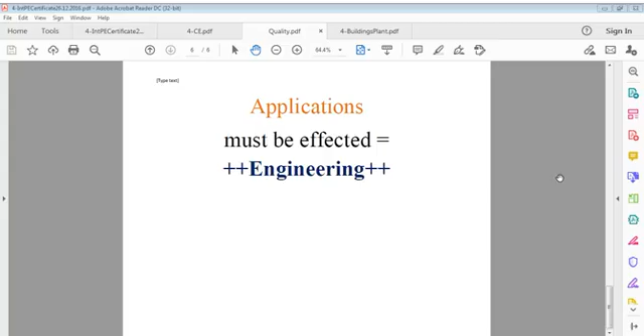So we get, in fact, artificial you can say, artificial in the sense that we can call our own made. It's natural products which we convert to our own making by thinking, by contemplation, and by compatibility of each. All materials are compatible, because they can work together once mixed, once cemented.

If we are not able to cement them, say these rock particles or fine or coarse aggregate, if we are not able to cement them, there will be no meaning to call it concrete, there will be no meaning to use it. Because God put in such properties in lime, for example, there is silica, there are so many other cementing properties it's got, and that's what we use. How we use it, what's the purpose, that's another point of view, it's another technology. But this technology we generate based on knowledge and experience and the blessings of God.

We got concrete today worldwide, the maximum used material in every construction. That adds importance of this natural product. God gave us this free of constraints, but we put constraint on that. Even today, we don't consider the full strength of this material for our construction.

Some methods consider 1/3 strength, 1/3 strength, for example working stress method. If you go to limit state method, it considers 0.66 or something like that, 66% use, and some other materials you find more than that. Same applies to concrete and also applies to reinforcing bars.

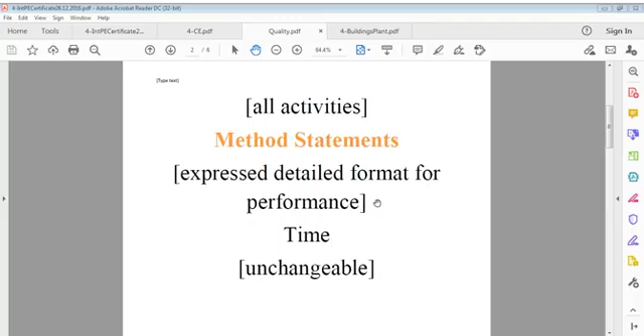We have to be reliable, our product has to be reliable, our services have to be reliable. That's the best profession. And we have to chart out ourselves what's the best I can deliver in the same cost as it was before.

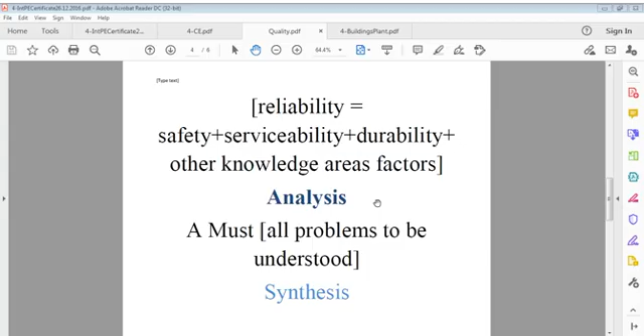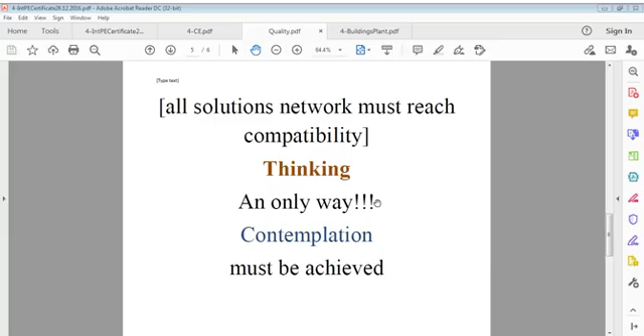We have to understand what we are talking of. We have to understand what laws exist in nature. We have to think and contemplate and to do everything. That's what engineering is all about, engineering and quality.

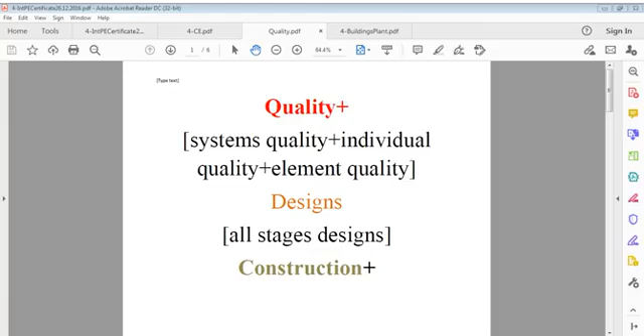And we have also to think further on this issue so that we may move further and further. We talked about many methods of importance, structural methods and finishing methods, and like that we talked.

I don't have video for demonstration, but you are educated, you can read it, you can understand it. Everything cannot be defined by demonstration. Yes, we can conduct a demonstration, but I think my talk is very common, very open. It has no representations and presentations. It's very much open talk, and that open talk we should respect.

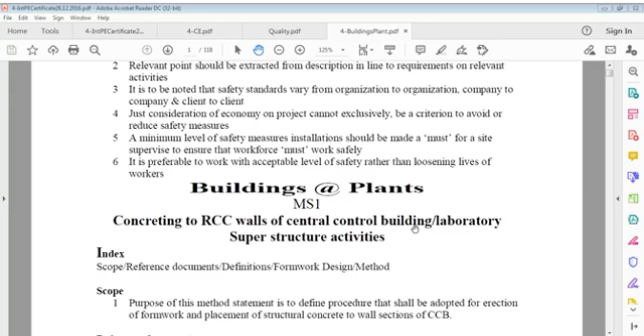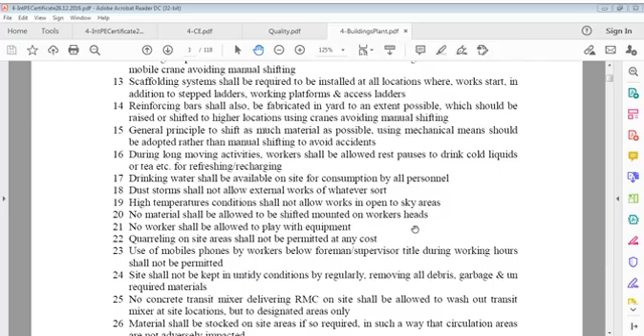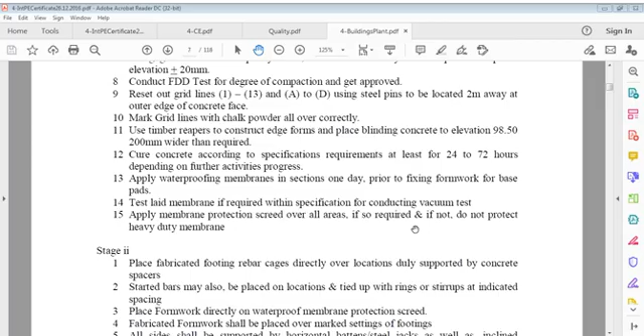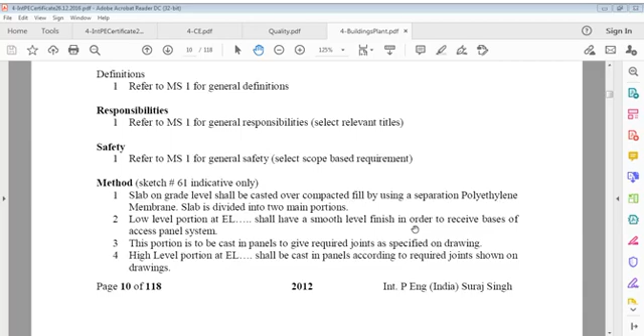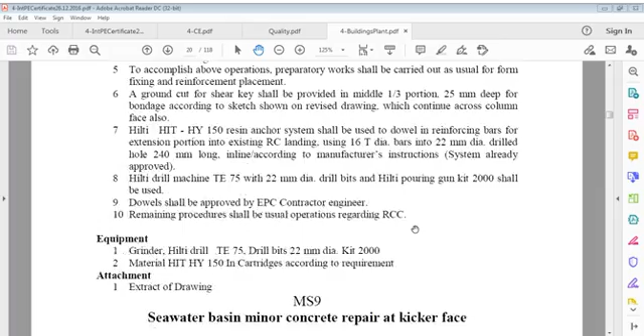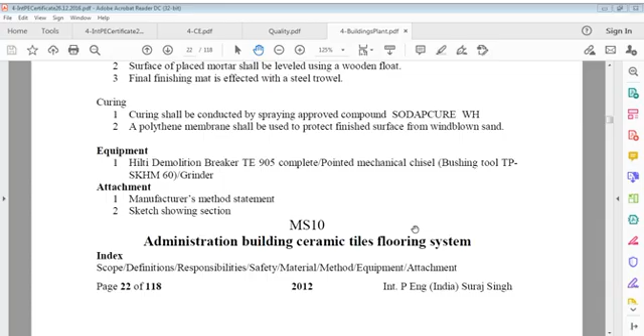When we streamline our system and our methods, that is based on our experience and our past successful works, and we take those into considerations.

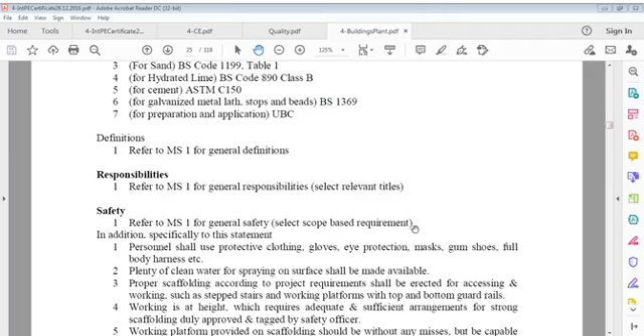There is no one method for something. There are many methods that can be used. Only one method is not enough. We can try different methods for different applications, and we can see which one is best, which is easier, which is more understandable, because those line leads,

Now, when we move further and further on these methods, we will find different types of works that have been carried out. We had gone through all these lines with safety and reliability. These are very small items, but important items.